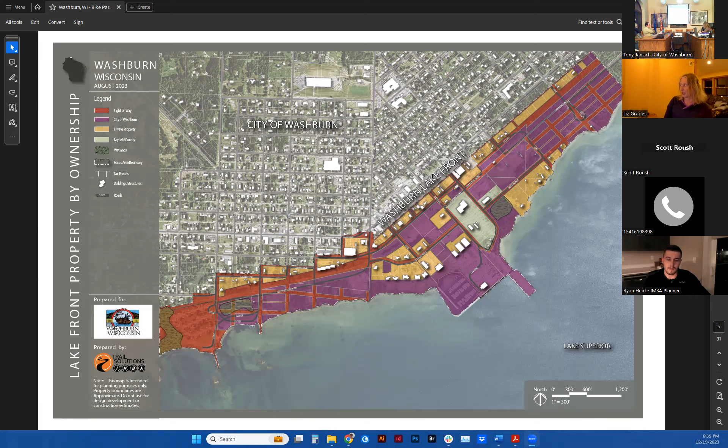We started with an initial ownership analysis to understand the project site at the City of Washburn waterfront, identifying areas that were owned by the City of Washburn or right-of-way properties, private properties, or other county properties. That set the stage for the selection of our project areas.

Out of that, we selected 3 project areas with enough acreage to have the potential to support bike-related facilities. We also identified a 4th, further outside of town, to understand if there was another option within the city or outside of the city as another potential.

But the 3 main sites were: the first site is off of Holman Avenue, the second site is along Omaha, and the third site is near Memorial Park.

So looking at those sites and having an understanding, we were really looking at, what's the user experience? What are they looking for? What are people looking for? And identifying those things. Some of the main components of that are family and social time, exploring nature, challenge, play, and exercise.

From that, there's a broad range of bike optimized experiences that meet those needs. Within this project, we are really focused on the bike park facilities and how those relate to the different sites. But there is a broad spectrum from single track trails to pump tracks to bike parks to competition areas for youth leagues like the NICA League in town. We're just going to walk through some of those.

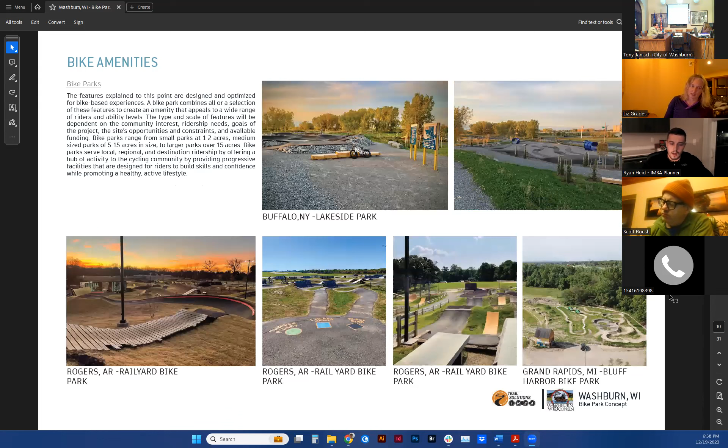The next one here is going to be a larger focus for both of the concepts that we're going to be showing. This is what we would consider here at IMBA a bike park. These are specifically designed and constructed for bike riders, and many of them are promoted for their bike features and for raising your skill level as a biker.

Generally, the smaller parks range anywhere from 1 to 2 acres, and they can go all the way up to 15+ acres on some of the bigger parks we've seen. That's dependent on the slope of where you're putting the park, and also the type of landscape where you're going to be adding it.

Primarily these are made from either a natural dirt surface, or in a lot of cases an asphalt or chip seal surfacing, like what you'd see on roads. We prefer bike parks or pump tracks to be asphalt or a hard surface, just because of the maintenance cost. With these, they're going to have prefabricated metal and wood features, which are a lot of the jump features you'll see in the imagery. These do have a higher cost, but they last much longer.

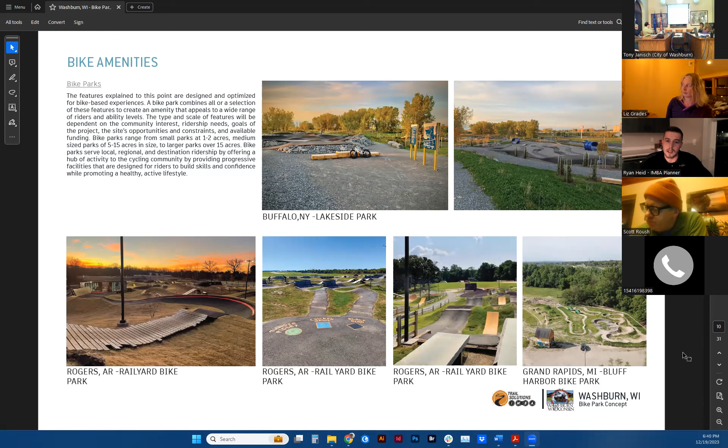On to the next one, which is the pump track or pump parks. These are hard surface skill building zones, essentially. They can be a natural dirt surface, but here at IMBA we don't recommend that, just because of maintenance costs, and they do fall apart quite quickly. So anything we're showing is going to be a hard surface. Typically pump tracks are asphalt, but they also come in modular systems, which we'll talk about.

The modular systems can be concrete or composite. Here at IMBA we typically consider a pump track an all-wheels feature, meaning anything with wheels can typically ride on those.

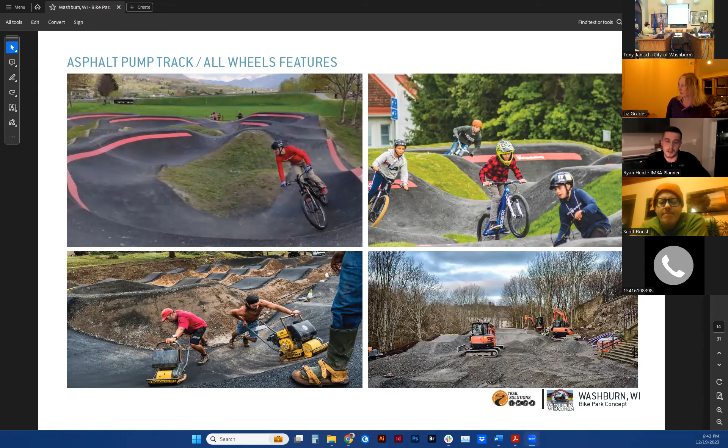And again, with the users for pump tracks, whether it's asphalt, modular, concrete, or composite, essentially anybody with wheels can be out here. This shows skateboards, BMXers. We even have people in wheelchairs that have been using a lot of the parks we've designed, which is great.

And then we'll get into slope style lines. Essentially a slope style line is a linear pump track with a lot more prefabricated features. These can range from beginner to advanced, and can be natural surface if you have a substantial slope. But we prefer asphalt or chip seal, since depending on location, you can put it basically wherever you prefer.

These are low risk, high reward style mountain biking. Because a lot of the prefabricated features are pre-engineered, everything is much safer. These do come at a higher price to put in, but you get higher use, a higher safety level, and they're built to last.

The closest one to where you guys are at is a park we designed this past year, down in Sioux City, Iowa. If you get a chance, I'd go down that way. We're also showing a bunch of places down in Rogers, Arkansas. That's where the closest would be.

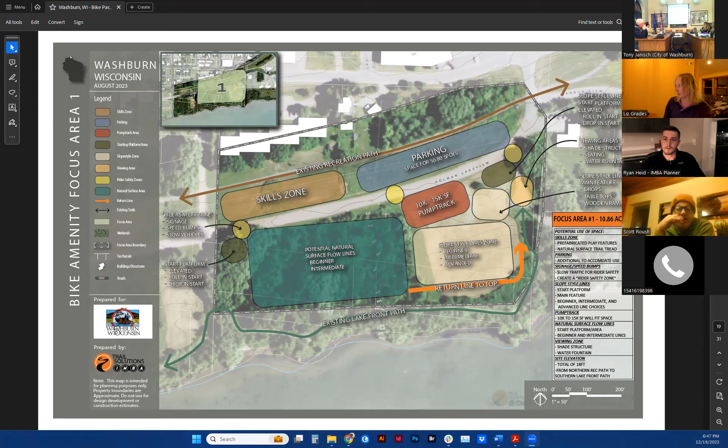This was focus area 1, again the Holman Avenue. Focus area 2 was off of Omaha - a variety of different ways things could be configured along this site, from parking to pump tracks to slope style courses and skills areas. We also did a study for the third site at Memorial Park, showing some of those other options and what would be possible within those areas.

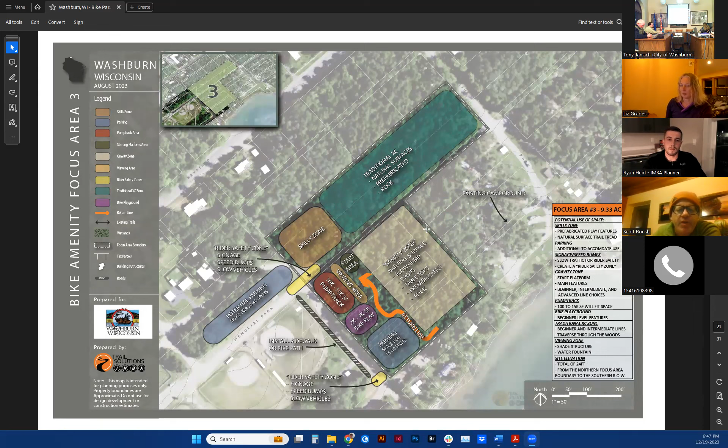So from those initial studies, we conducted a site visit in October and did some on-site analysis to ground truth some of those initial thoughts, getting a better understanding of each site, what's available, and what our constraints truly are once we saw them on the ground.

The first site, Holman Avenue, had a really great option - a wide open field with very minimal existing infrastructure constraints. There were some needs for the right of way to be maintained for well access, along with existing access to the walking path. But there are also opportunities to provide a few additional amenities for trail users already using the walking trails, such as restrooms and additional parking. This site has room for multiple bike park amenities.

There's really good slopes, gentle topography, with ideal grades for some of those slope style type courses. If there's an existing access point that's easy to get to and maintain, it also provides proximity to some wooded area with an opportunity for connectivity for some of those more natural surface bike optimized trails. One of the biggest benefits is the proximity to the schools and downtown, with easy access for kids to get to this site.

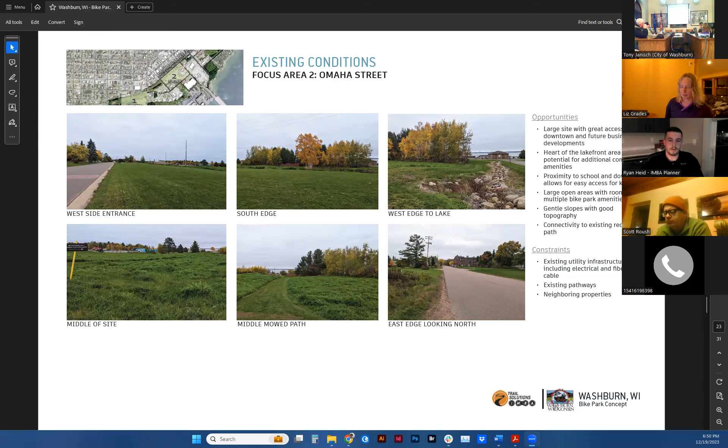The third site we looked at off of Memorial Park Drive was a fairly wooded site. The site has a lot of potential for some natural surface trails. It also had some really good slope and interesting terrain features within the woods, and has some potential connectivity to existing pathways and other trails.

This site offered the most constraints though, because of the wooded area and the needs to really create one of those more bike park oriented developments. There would be a ton of grading and clearing that would have to happen to make this site a potential, and there was a lot of limits from the terrain for some of those other bike park features, such as the pump track and skills line.

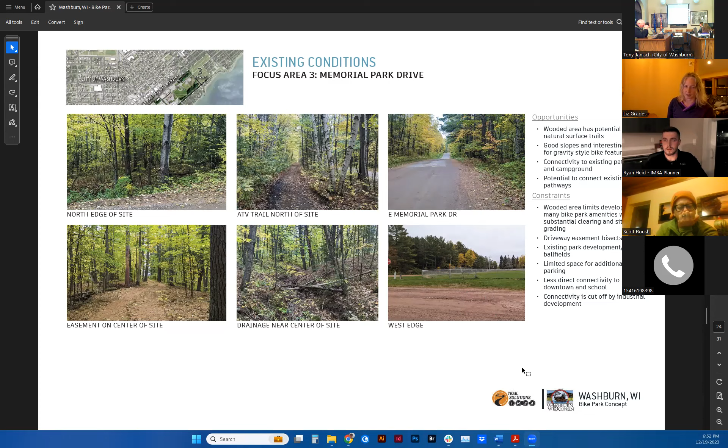There's also a driveway easement that bisected the site, really cutting it in half and limiting what could happen within the woods. Then in the open and flat areas of the site, there's Memorial Park, the ball fields, and other existing development. There's also limited areas for expanded parking within that site. And the main part of that park has less connectivity because of the industrial development separating that site from the other two sites.

So while we were there doing our ground truthing of the three sites, we also had some community engagement with local trail groups and trail users, along with other folks from the community. We were there to hear what the community was interested in.

Can I make a request? Is there any way that you can make that larger so the folks in the room can see what is on their screen? Is that better? I'm showing the full screen. That is better, for me. Okay, it's close.

So the community engagement, some of the things we heard that folks in Washburn were looking for is big jumps and a concrete pump track or other durable surface, trails for all ability levels, amenities like tool stations and washrooms or bathrooms. Very interested in something like Cuyuna Bike Park.

Being close to school was really important. There was potential for school kids to use that as part of the class. And kids were very interested in having a place to just hang out - that was really important to some of the youth that we heard from while we were there.

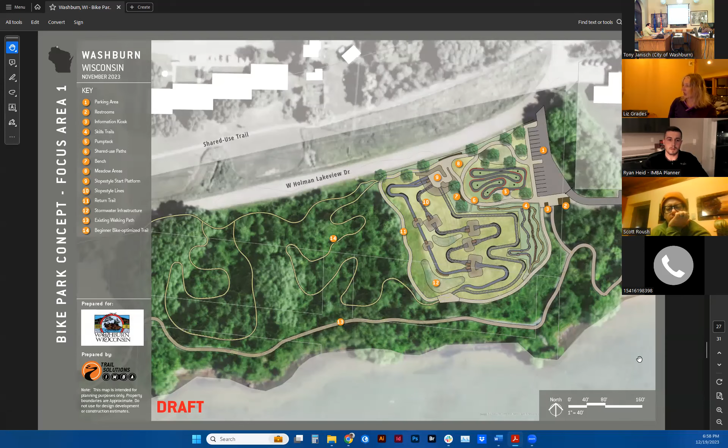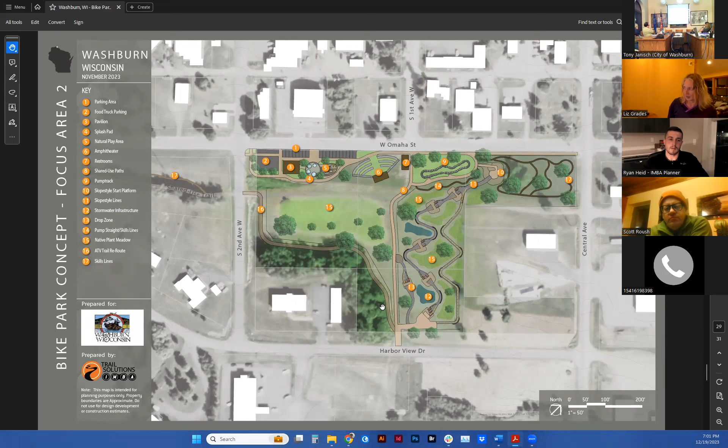So that's what we have here for the presentation, and we can open up for questions if you want to go through with that.

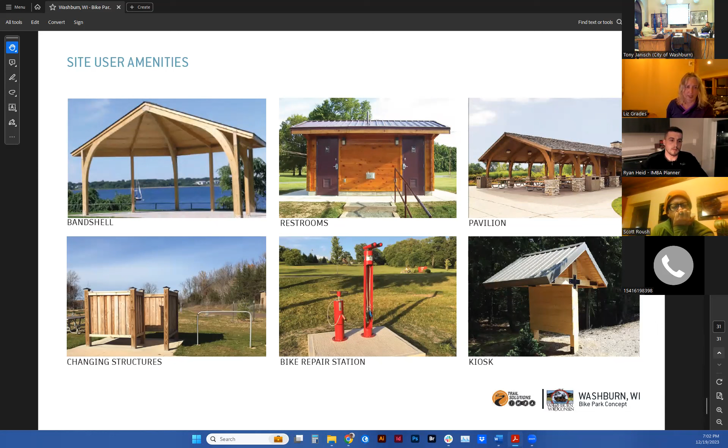Yeah, this is Erica on the phone. Could we, committee, are you in favor of asking questions first and then perhaps opening the floor? I guess that's up to the committee, or which way do we want to do this?

I would move to open the floor when we're ready, but I'd specifically like to hear from community members, sort of how they see themselves involved in maintenance and caring for this. Overall I'm supportive, but I am thinking a little bit about long-term maintenance. IMBA, could you guys speak to that at some point - what is the usual lifespan of some of these features, and what are maintenance costs typically, and how do groups like friends groups get involved with helping an entity like the city care for that type of stuff?

Okay, thanks Erica. Tony, do we want to bring up the Washburn side of the group, the steering committee, to see if they have anything they'd like to answer on those kind of questions? There's a steering committee, like Charmaine and some of the folks we've been on calls with, that started working with, they got the grant monies. Yeah, like bring them up first and have some discussion. I'm sure you guys have some stuff you want to say, and then we can kind of just go from there. I think that would be a good way to start.

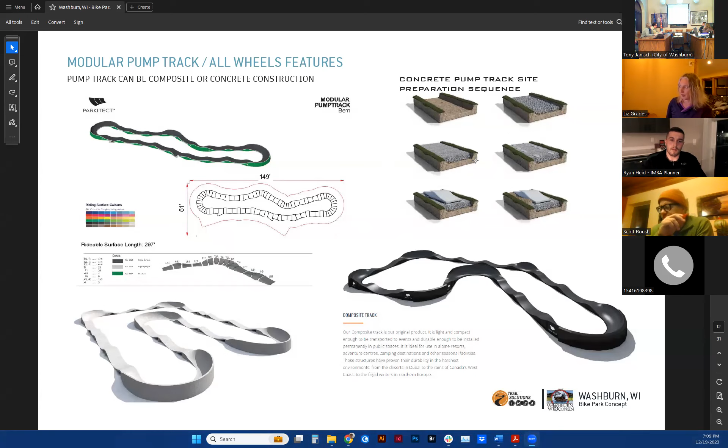Yeah, going back to the presentation, hopefully you can see this. For those prefab pump track features, that's set on a durable gravel base that prevents frost heaving. There will be minimal needs for that surface, along with the concrete, because of how it's constructed. So those are rated and put in places very similar to Washburn and that type of climate. Thank you.

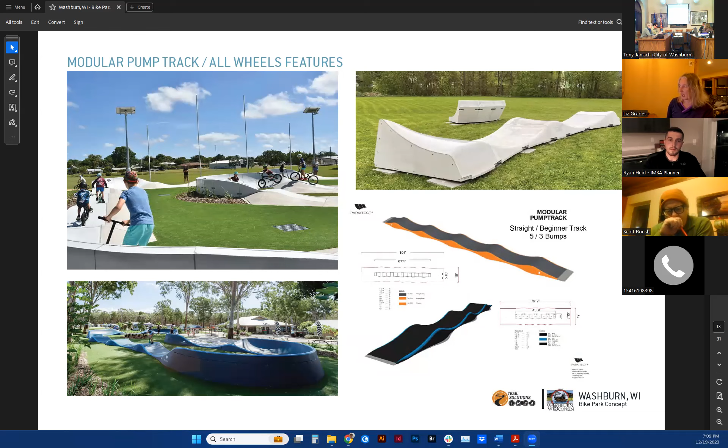This is Erica again, sorry, I know I can't see anyone. Does anyone know how Stage North feels about this? I know we've heard from a lot of folks, and in the interest of time we all read the support letters, so I think we know. I'm not sure how much public comment we want tonight, but I feel like I've heard how people feel about this pretty well. I'm just curious, in addition to the businesses we heard from, how Stage North feels, or maybe some of the other nearby ones we haven't heard from.

Okay, yeah, I would imagine at this point this is just conceptual. To address Erica's question, we've had contact with the owner of Stage North and his daughter who manages the bar. Most of our conversation has been with his daughter and her partner, and they seem pretty excited about the idea that something could happen across the street that would be conducive with what they're doing. There was an email connection between myself and the owner of Stage North, and we haven't had a chance to sit down and chat, but that's definitely on our radar for that site. I think a lot of it really depends on what happens from the Parks and Rec committee, how much more your fingerprints get on this before it goes to city council. But it's hard to have some of those conversations with business owners without knowing what site seems preferential.